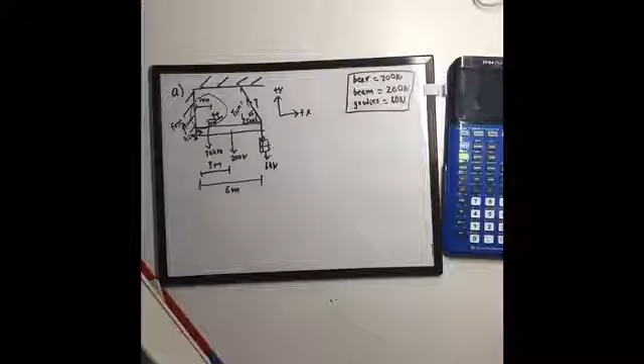The first thing we do for problem 20 on the homework set is draw a free body diagram, which is part A. I drew one ahead of time, and I just added in all the givens.

The bear is 700 newtons, the beam is 200 newtons, and the gift basket is 80 newtons, and the beam itself is 6 meters, which means the radius would be 3 meters. The problem also says the bear is 1 meter out.

We also know that this is tension, this string right here, and it forms an angle of 60 degrees. There's an x and y component. And we also know there's going to be a hinge right here, which we'll go into for part B. I also established that the upwards direction would be positive and the right would be positive.

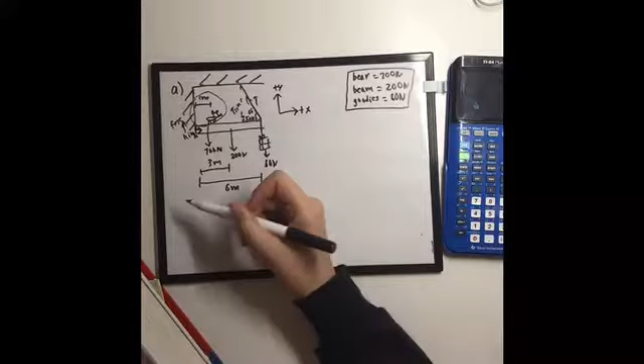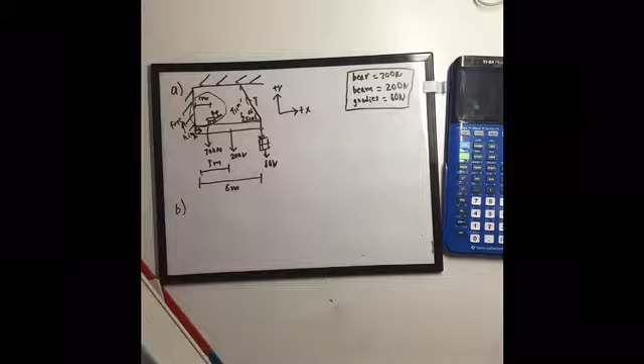For part B, they want us to find the tension in the wire and the components of the reaction force at the hinge when the bear is at x equals 1 meter.

So the first thing we should do is find the sum of the torque. We do the bear, then the beam, then the gift basket, and then tension. We're going to make our pivot point right here at the hinge, because we don't really know the forces happening over here.

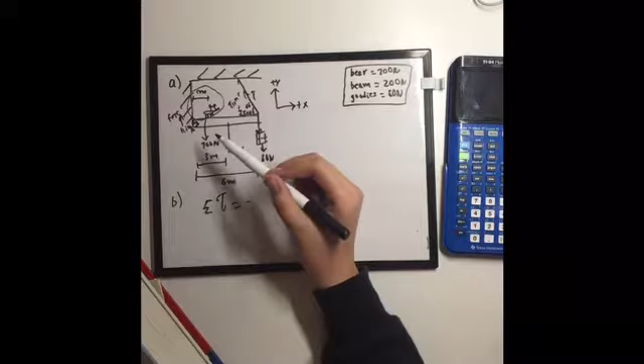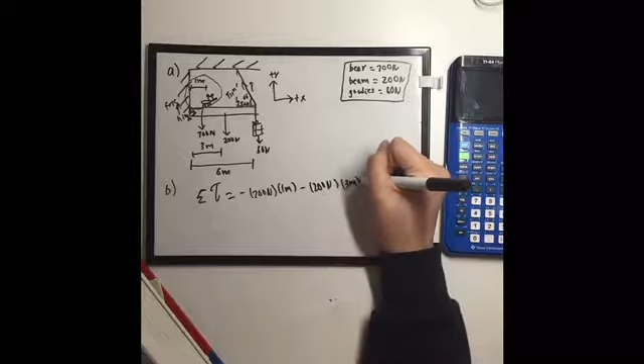The bear is going to be negative because it has a tendency to move the beam in a clockwise direction. So negative 700 newtons, and it's 1 meter out, times sine of 90, which is 1, so I won't write that. Then for the beam, it's 200 newtons, and it's 3 meters out, again times sine of 90, which is 1.

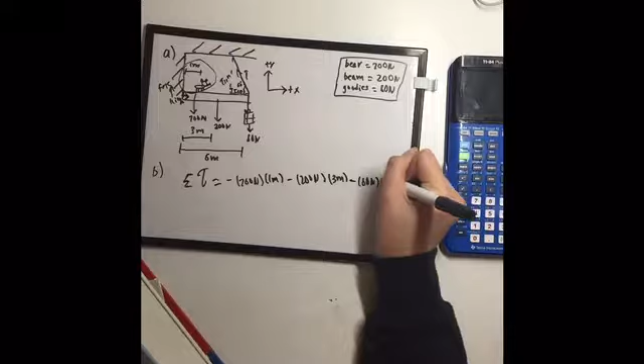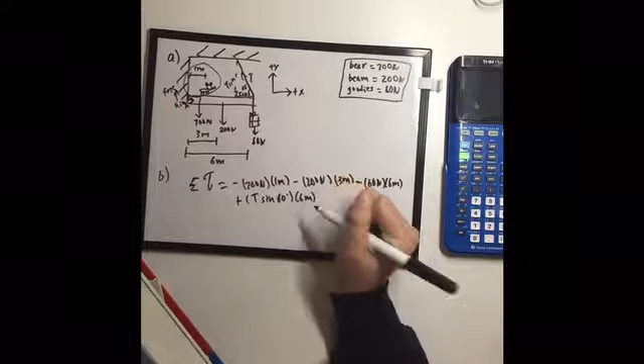The gift basket is also negative. The gift basket is 80 newtons, and it's 6 meters out, so it's all the way over here. And there's also the tension, which is at sine of 60, and it's at 6 meters out. And this is all equal to 0.

Once we plug these values into our calculator, we get tension equals 343 newtons.

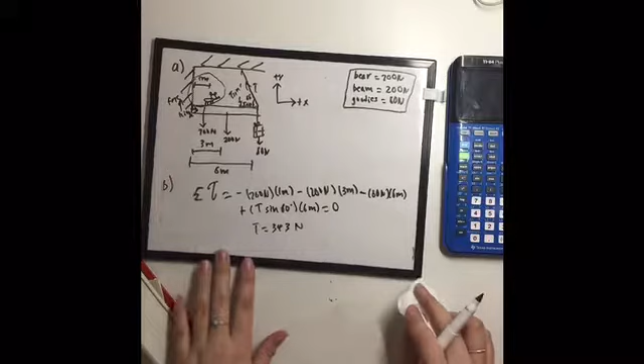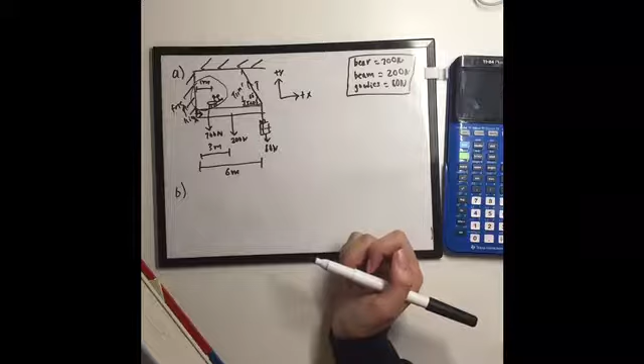Hopefully you got that part, because I have to erase this and find room for the other part of part B. So they want us to find the components.

We're going to do sum of forces in the x direction. We said that there was force of the hinge going towards the right. So that's going to be force of the hinge minus tension in the x direction. This is all equal to 0 since this whole diagram is in static equilibrium.

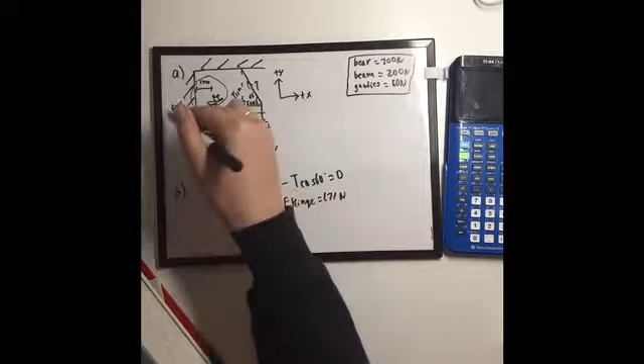So we find that the force of the hinge is equal to 171 newtons. Then in the y direction, we do the force of the hinge, which is going upwards, and that's positive, minus - we're going to add all these up and then subtract it. So once we add up 700 plus 200 plus 80, we get 980 newtons.

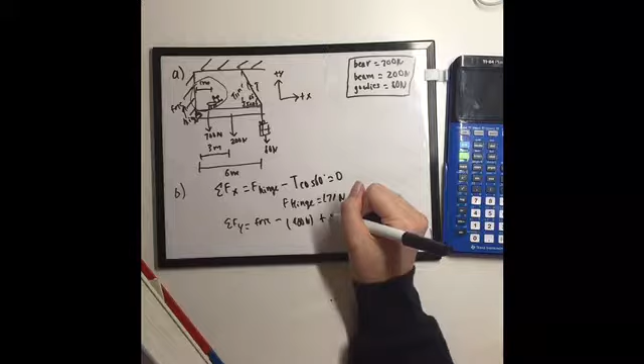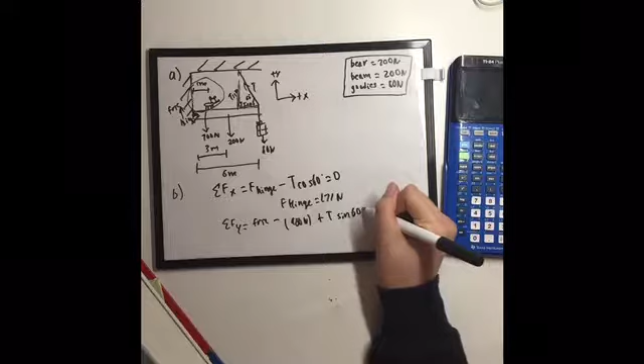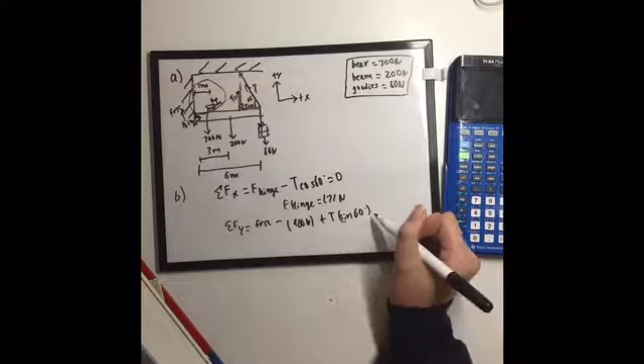Plus tension in the y direction, right here. And then we already solved for tension, and we're just going to plug that in. Once we plug all that into our calculator, we get 683 newtons.

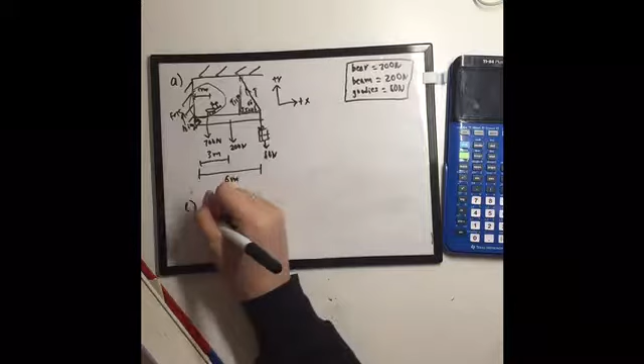For part C, the question asks... I have to refilm it now.

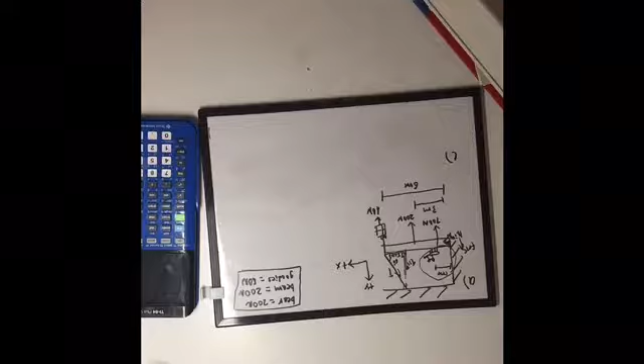For part C, the question says, if the wire can withstand a maximum tension of 900 newtons, what is the maximum distance the bear can walk before the wire breaks? So I'll just write out what they told us.

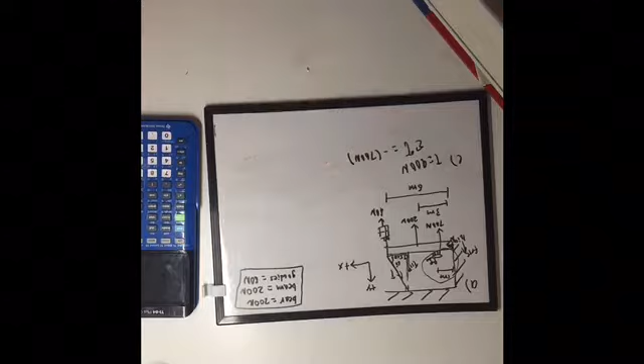What we're going to do is sum up torque again. I'm going to write this out. So we're going to find the torques of the bear, the beam, the gift basket, and tension again.

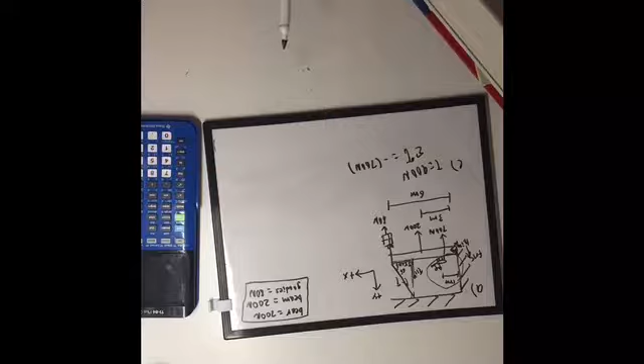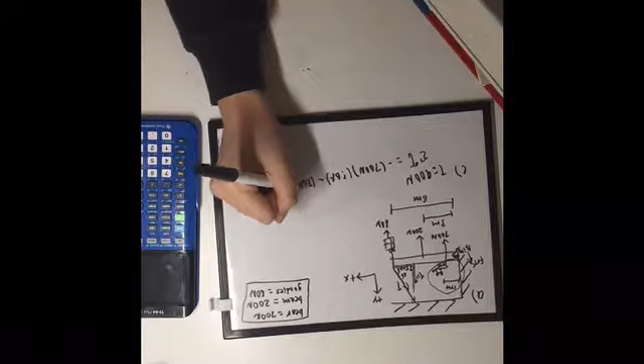This time we don't know the distance of the bear because we're trying to figure out how far it can go out. So again, it's negative 700 newtons times an unknown distance, minus 200 newtons times 3 meters, minus 80 newtons from the gift basket, which is again 6 meters out.

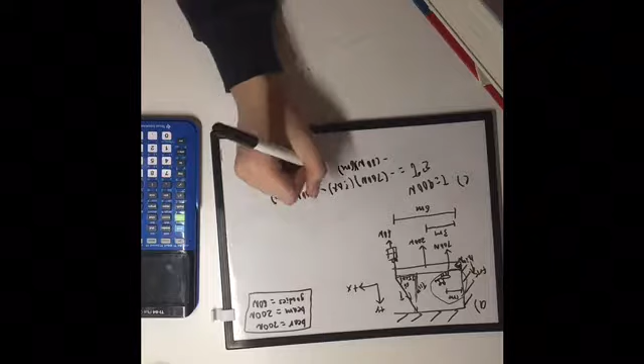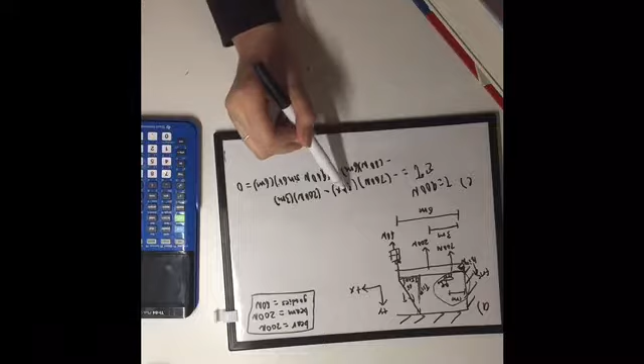And we have 900 newtons times sine of 60, and 6 meters out. This is all equal to 0. The only thing we're looking for here and trying to solve for is the distance.

Once we plug this into our calculator and do some algebra, we find that the maximum distance the bear can go out is equal to 5.14 meters.